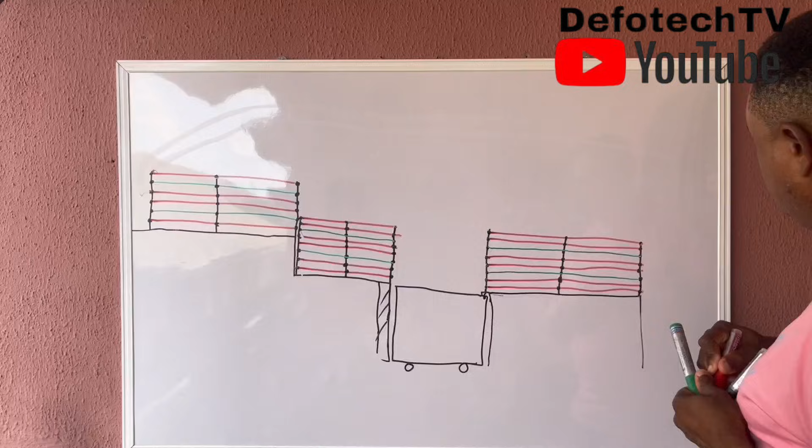We'll also understand that the 6 lines is live, earth, live, live, earth, live. But for the 8, live, live, earth, live, live, earth, live, live. So there's also a step here. All right, so this is the 8 line.

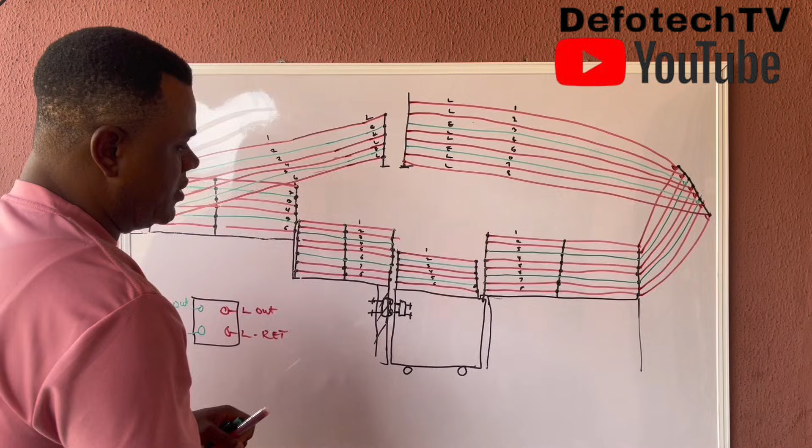This is the 6 line on the gate, and this is the gate contact. This is the female part. Always ensure your female gate contact is on the pillar while the male is attached to the gate. This is the male and this is the female.

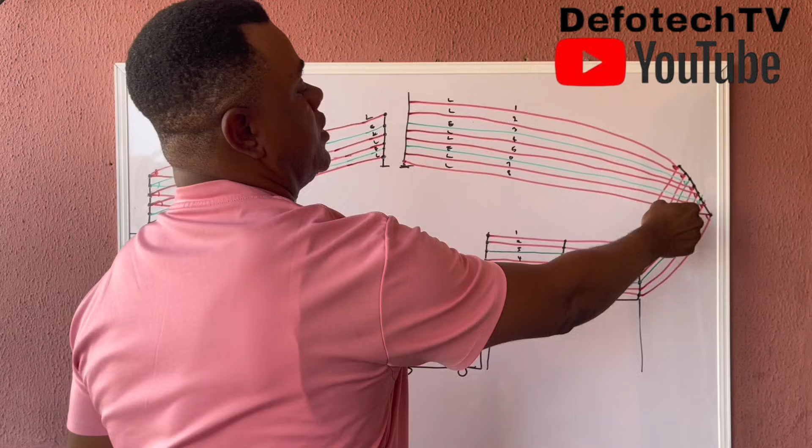All right, then this is the 8 lines also. There's also a link between this and this, each of these ones going this way. So it's like a complete perimeter, a covered compound. So we need to also close here.

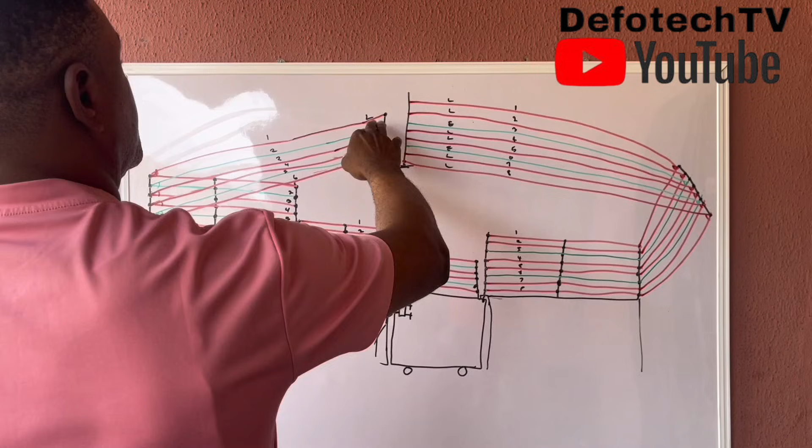So this is where we have our Energizer, the live out, the live return, the earth out, the earth return. So let's see how we're able to configure this and bring them together as one.

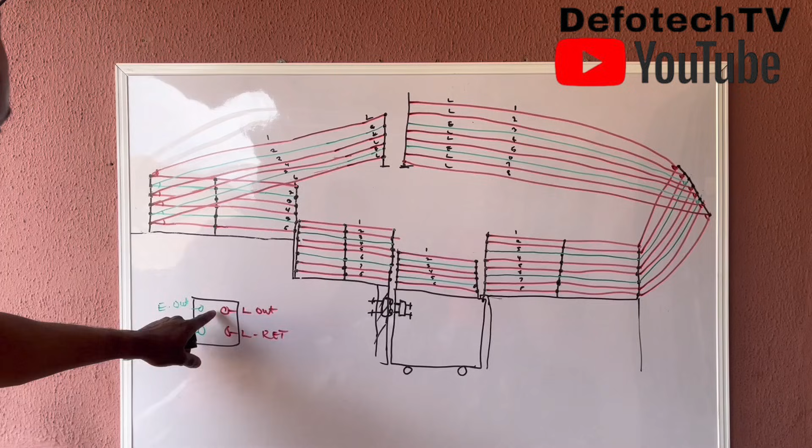Now, here is the area I was talking about. Let's assume it was continuous. So I will decide to pick here as the closest to the Energizer. If I bring it here, I think it's far. So I want to use here.

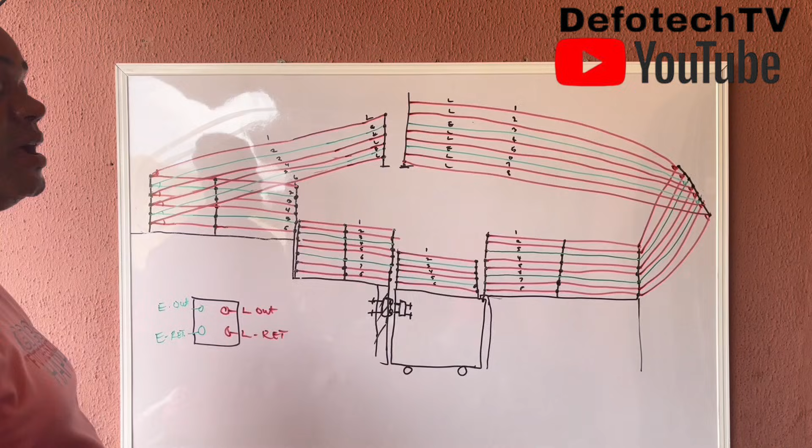Please always note, don't ever bring one cable and just put one here. There should be a separation between this and this. Let me assume, because if you want to separate this line, you have to cut this line. So let me use a spring and a hook to demonstrate.

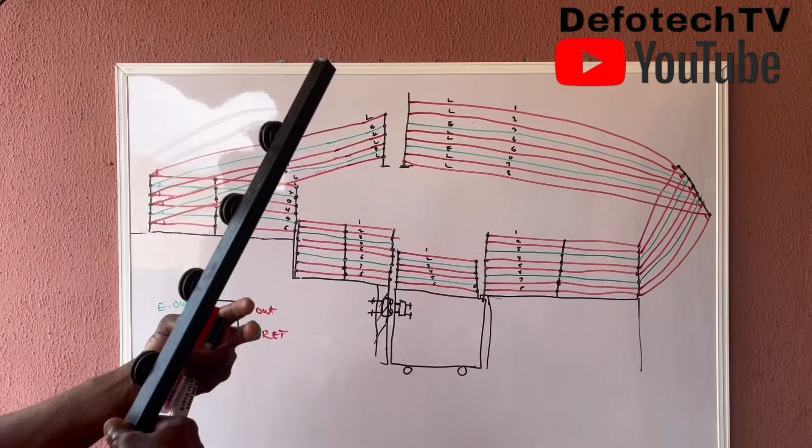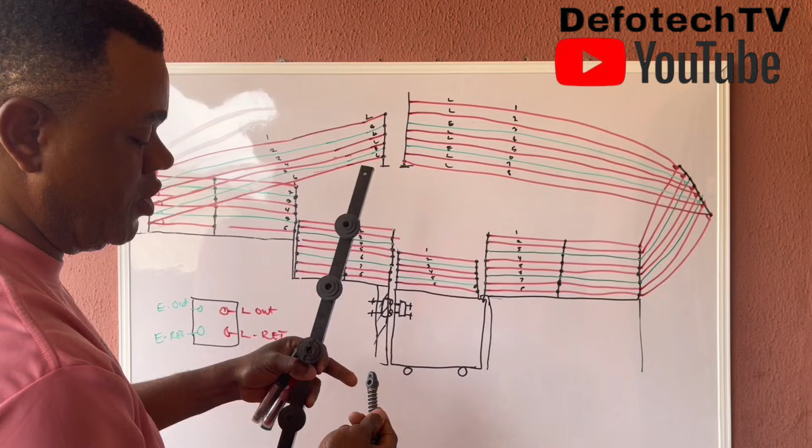Assume this is what you have here. This is this pole. If the lines are going all the way, cut one side off, then ring this other side to the fence. This other one's here, the other one here. You put your hook to your spring.

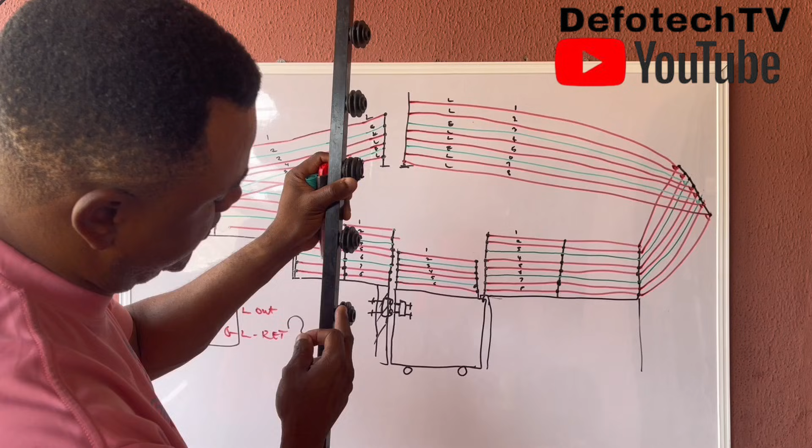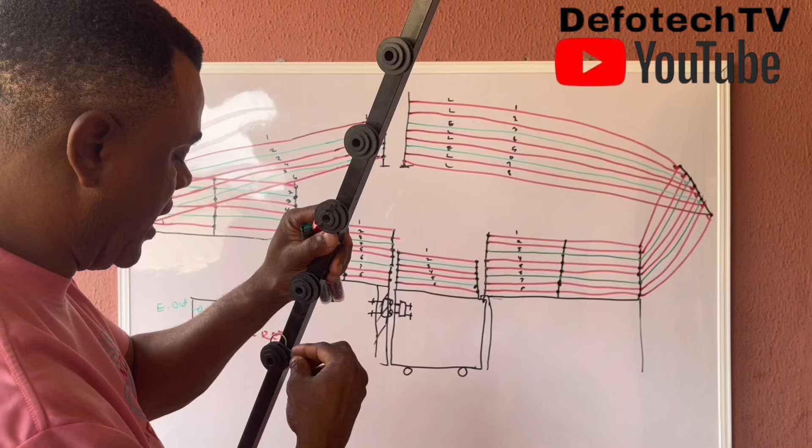You know there are different segments on your pole, on your bracket, your bobbin. You have the inner one. You can decide to come, either you want to use the inner one, since your wires, the first wire coming to this side, they'll be wound around the middle groove. You can decide to pick the outer groove, clip your hook. So you have something like this.

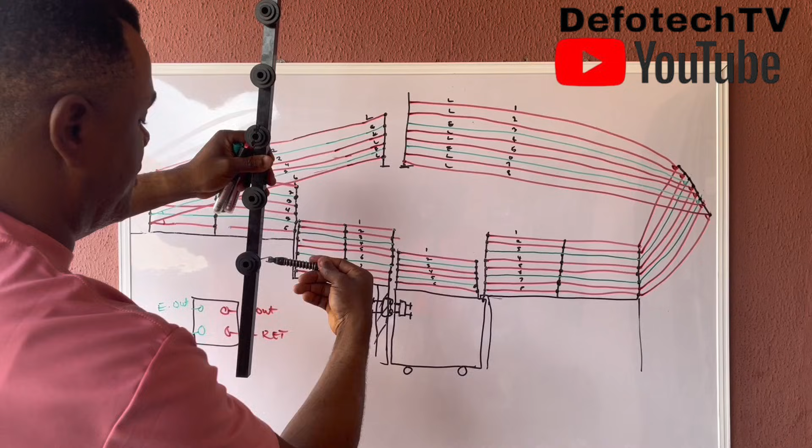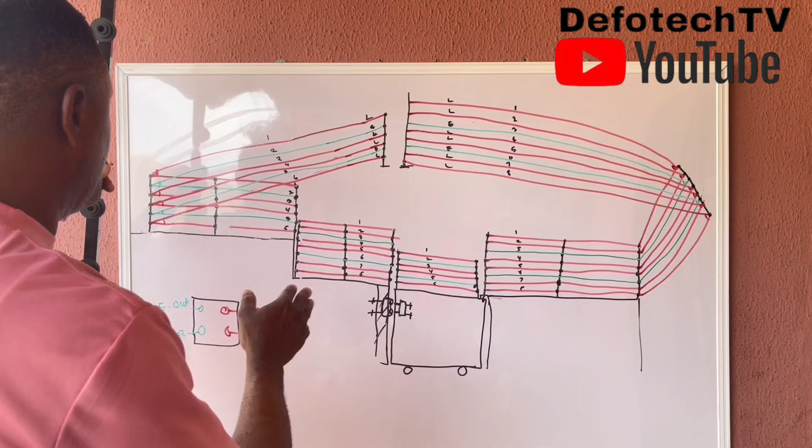That is what you have here. Then this wire from here, attach it to this. So it's therefore separating the wires coming from this side from this. So this is how we prepare where we want to connect our Energizer, because it's not at the edge. This is necessary to always separate it so that your movement or flow of current would not come in contact with each of them.

So we're able to bring more secured stuff here. So now this is what we have done, been able to do that. So we have a spring here. We're able to separate here from the side. So the wire stops here. So I can now decide to say, okay, fine.

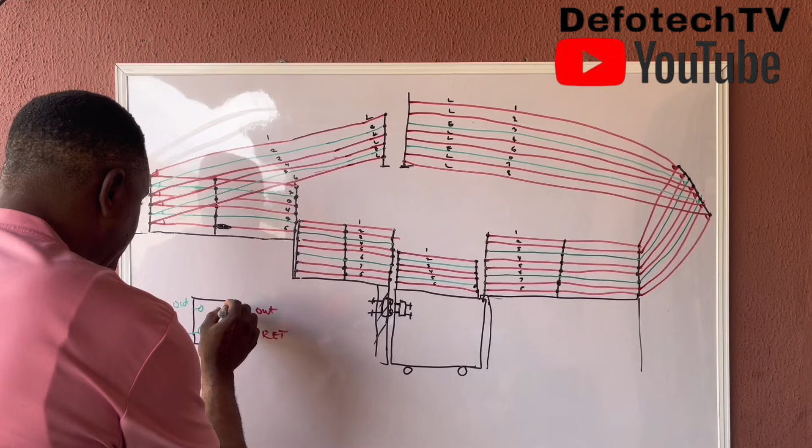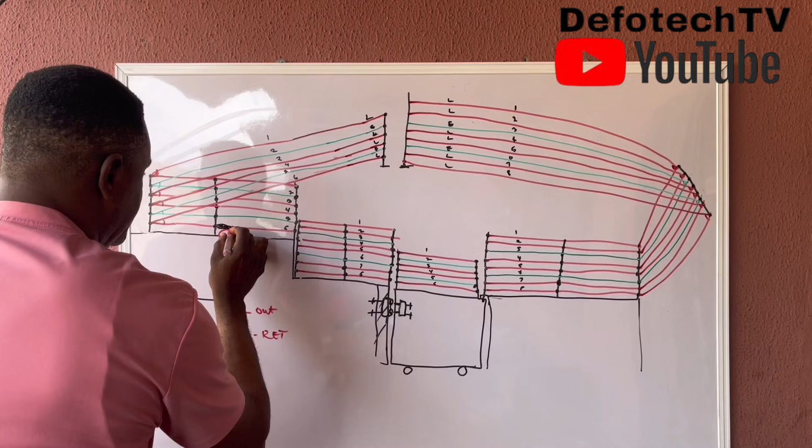If we don't, let's treat this thing independently. I'll take the live out here. Take my line from here through a conduit, the HT cable, and I come attach it to this line here. If I attach this here, all I need to do, just watch before we deal with this other side.

Now, I'll just come here and bring this, gets here, I'll loop it with this. When I get to the extreme here, see this fence is a continuous fence from here to this end. So it means every of the edge I stop here. So it means one moves all the way from here.

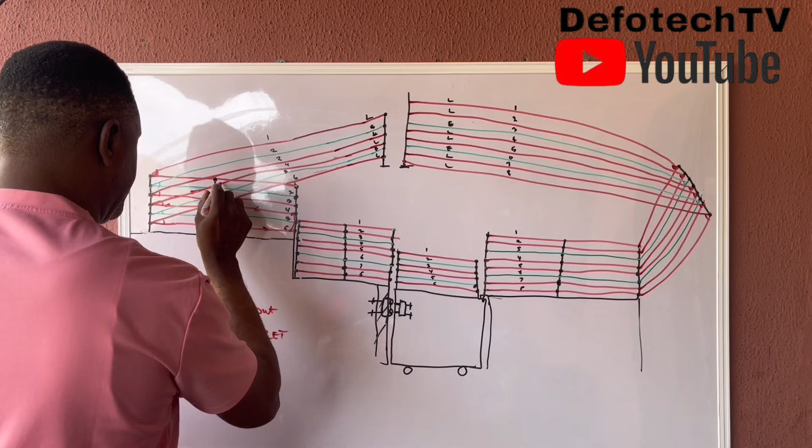It gets here. Hey, sorry, I forgot this line. It's traveling up, it's traveling this way. When it gets here, all I need to do is to loop this to this here, at the extreme, closer to the pole. So it's returning.

When it gets here, it comes this way. It gets here, that's the edge again. So I bring this one to this, which means it's moving this direction.

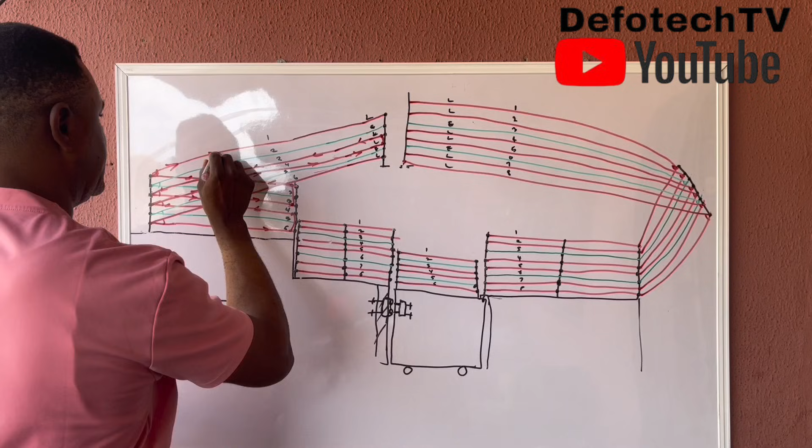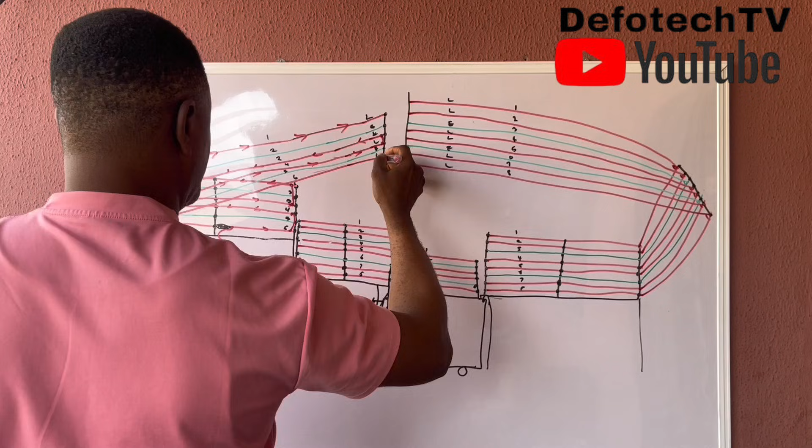When it gets to this point, now this is where we have another part to deal with, because this one, the first one, came here. So this one, there are two things. If I decide to bring this one to this place, it means it returns to the Energizer. I won't come here, I won't touch this.

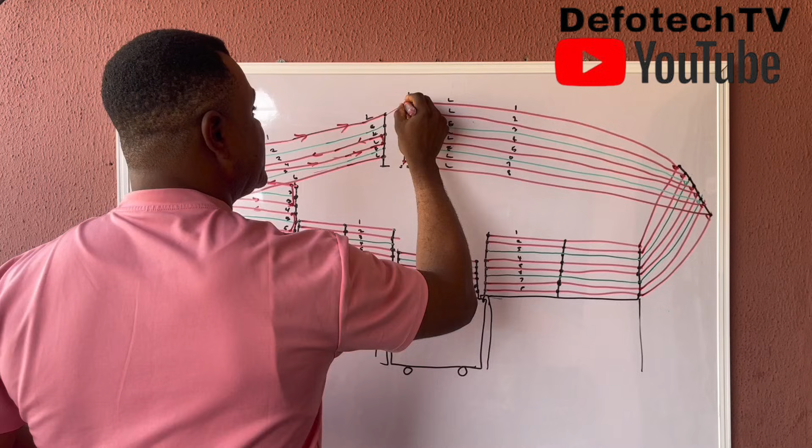So from here, this is the 8th line, this is the 6th line. I can decide to say, okay fine, if I'm taking this to this one, we have either it's going to the top line. So I prefer to take this, link this one to this, to the topmost line. Yeah, to the topmost line.

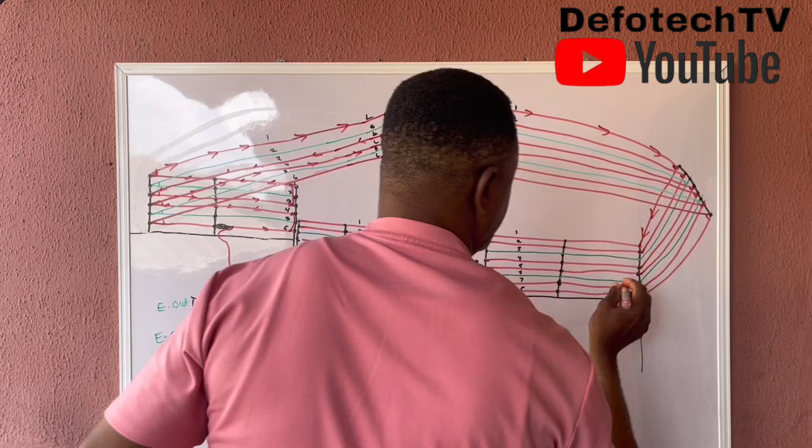Yes, from here this moves all the way, continues. So we're dealing with the 8th line. You remember this line comes all the way down here. It continues from there, it gets here. I'm not going to touch this here, just to see what we do here. So we get here, we move to the next line.

Can marry this to this at the extreme. So we're moving back. It gets here, it's coming this way. And this gets here. Oh, I'm coming out.

I can decide to come, let me marry this to this, at the edge, right? This gets here, continues here. Come to this other one here. So this returns.

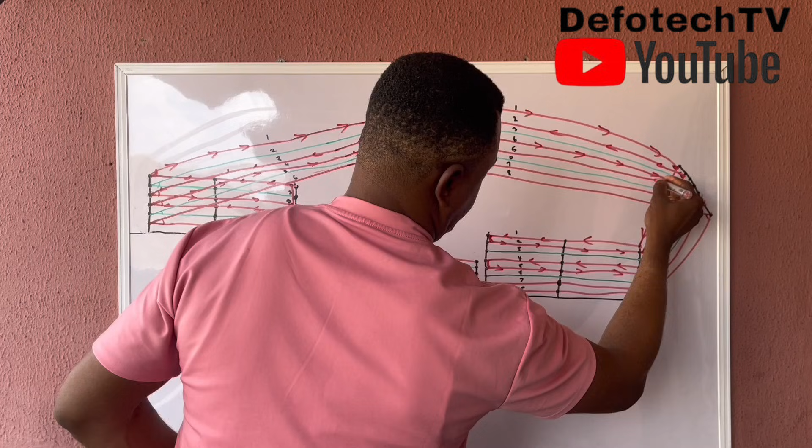It gets here, it moves this direction, moves this direction. It gets here, take this one to the next line. It continues all the way. It gets here, it's coming here.

Now we've gotten to the extreme here. Sorry, where did I jump to this line? So this one is coming here, it gets here. This marries this last line. Start returning.

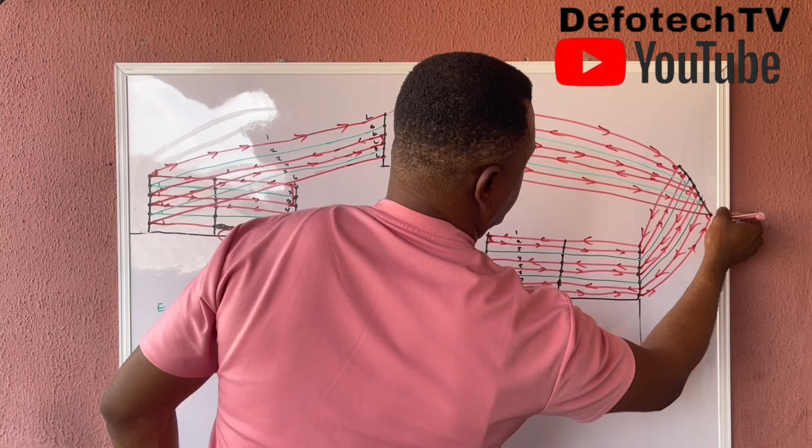Okay, yes, I'll do it this way. Yes, all the way from here to this guy.

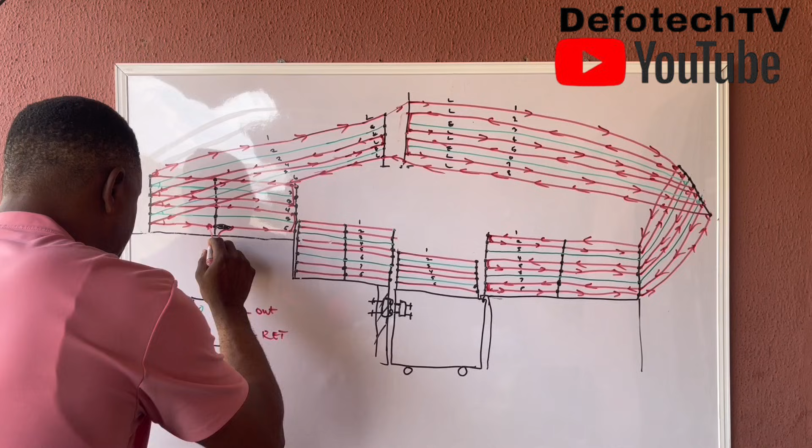It needs to come back to the Energizer. But you ask one question, you say sir, we've not done anything here. Don't bother yourself, leave it, we'll deal with this guy. So now let me take this to the Energizer. I'll take it to the return. This is out and this is return.

So we are concerned with this. Are we going to leave this place? No. But we've sorted out everything here apart from the earth. We've not touched the earth here. So, but let's leave this aside, we'll deal with this guy.

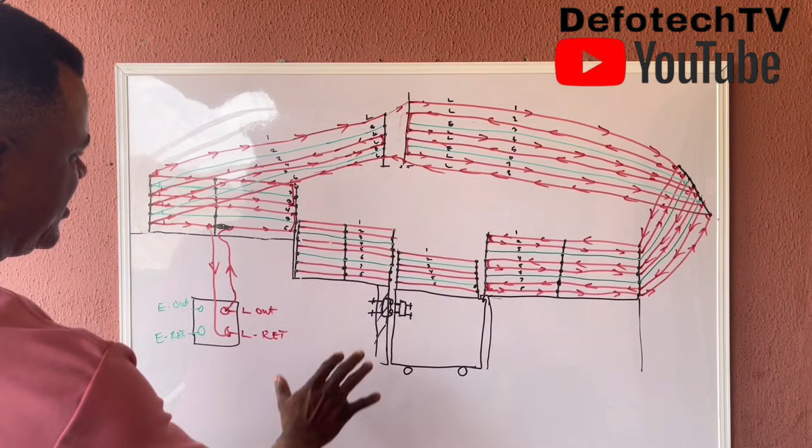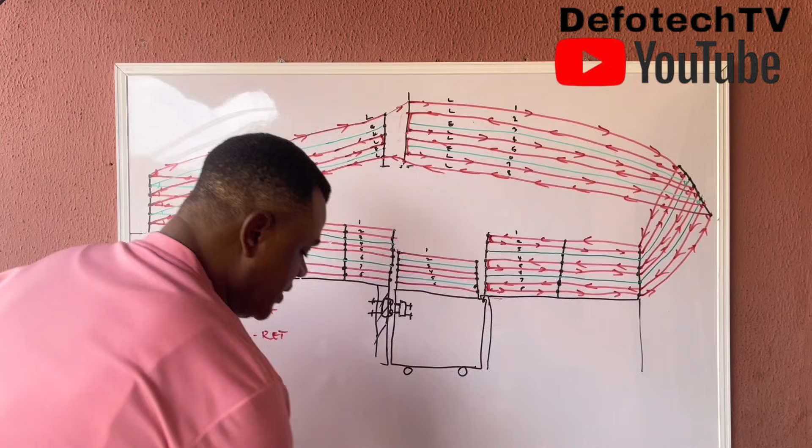So let's treat the earth. Now the same thing applies to the earth. We want the earth, we want to loop here. We will not take our earth out. So what we need to do again, the same principle we applied here, is to break this line.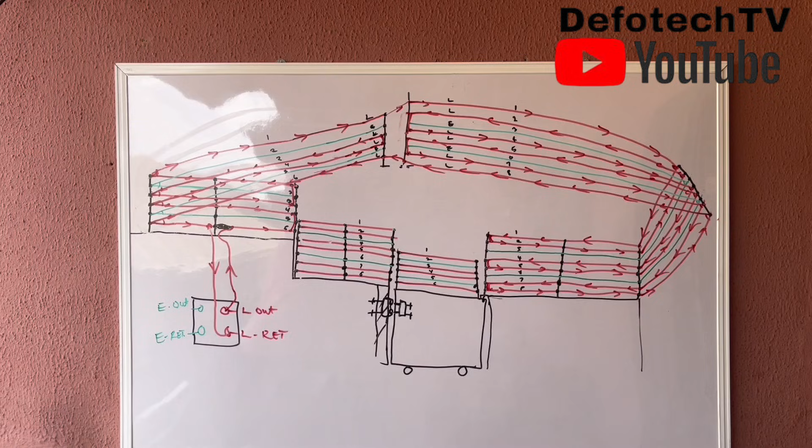Sorry, let me get stuff to break the line. Okay. I will put a spring here. So it means there is no more flow from here to here, just like we have here, using a spring.

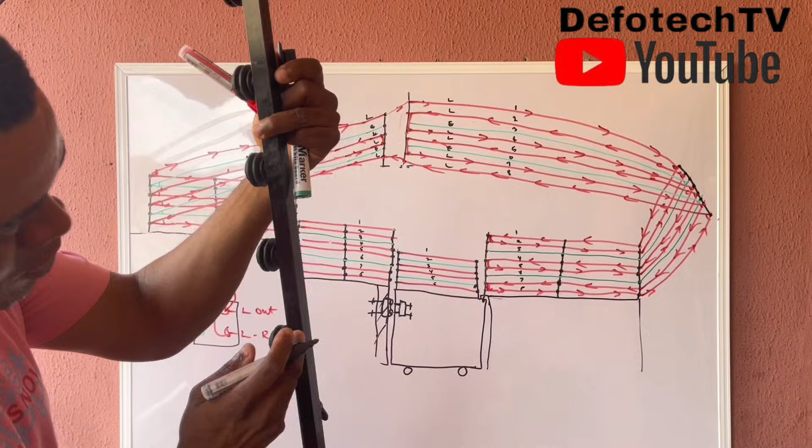One of the lines can come at the middle, use the other groove here. You see this groove? One can be here, the other one can come here with a spring. All right, so what I'll do here is to get, so let's say my E out. Okay, let's assume...

This marries this, then it means this goes all the way. It gets here, I'll need to find a way of marrying the other edge. This one moves all the way, it gets here, this is going up. It gets here, I can as well just feed the last guy.

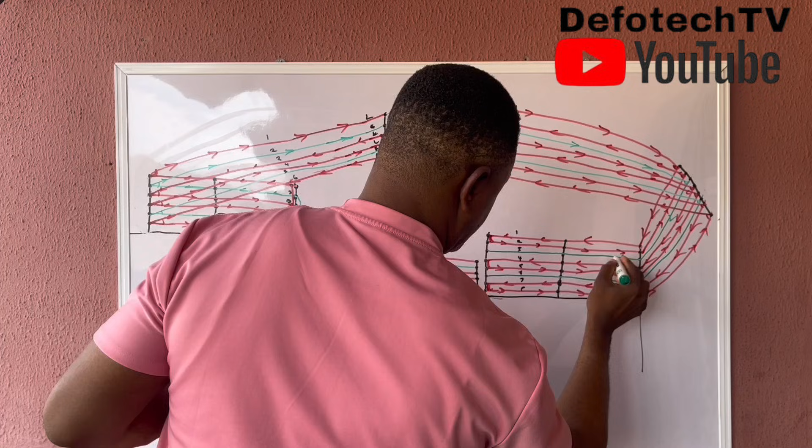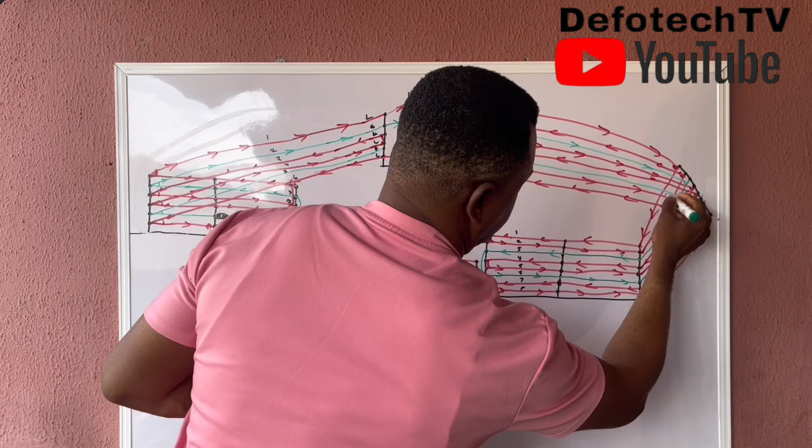I come here, all right, just to gets here, it comes down. It gets here, then I'll need to feed this, returns, bring back up. It gets here, feed this guy, this direction. This gets here, bring it this way.

So it means we've been able to close this gap, if there's any gap, so nobody can scale it. If you cut it on this line, the alarm goes off. Then this one comes this way, right? It gets here. Then when it gets here, it needs to go back to the Energizer. All I need to do is to take this with the same HT cable back to our Energizer.

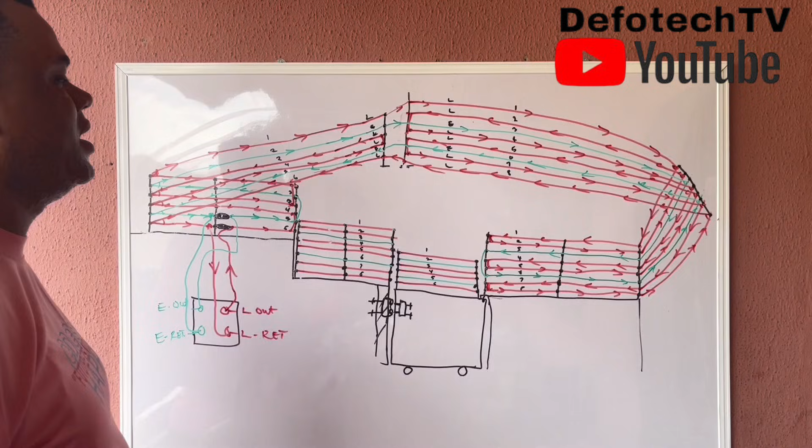Now you're still bothered about this. Now this is the time for us to deal with this guy. All I need to first do is to come to the gate contact. Now you must understand something that has to do with this gate contact, exactly, because it's a 2 poles gate contact. We have the 3 poles where you have your live out, your live return, your earth.

Because of this, we're going to have only the live to this gate, the earth, we can isolate it. But since the top and the bottom is covered, it means it's secure. If anybody tries to scale here, there'll be a problem. If you try to cut it, you'll have a problem.

So now what I need to do is take one from here first. Let's assume I feed this. This goes all the way. Just watch, this feeds the next live on the gate. This one goes to the next live. This also goes to the next live.

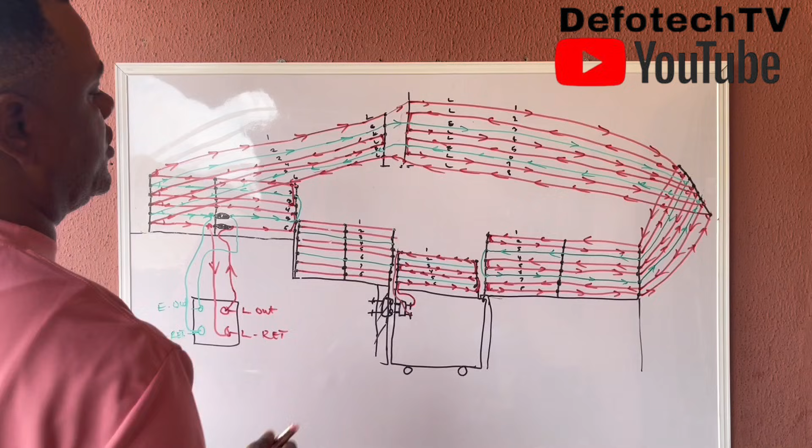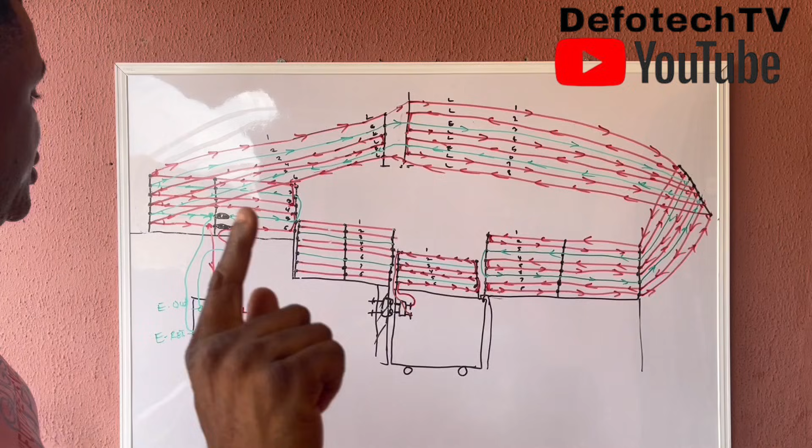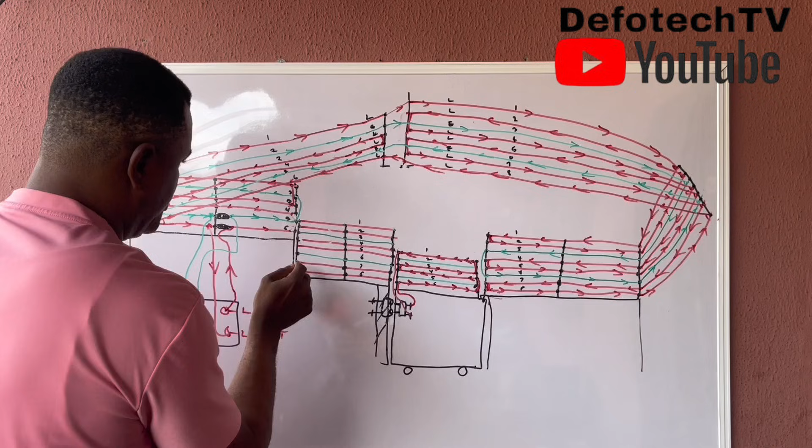What you need to do, just watch. This is the trick here. Come to this one closer to the pillar, to this step. Open this one up, open this place up. Open it up. Let's assume this one stops here.

So we've removed the loop from here to here. So now we can say this one is out, see the direction out. We take this one with the HT cable, we marry it to this, so it means there's a flow to this direction.

This gets here, marry this. This gets here, it marries this one. This gets here, it marries this. This one gets here, it marries this. This gets here, it marries this. This gets here, then you link this one back to this.

So as if now it's continued, it's as if a continuation. So if you look at this whole thing, this whole is settled. But we don't have supply to this gate contact. I've told you about the principle of how gate contact works.

You can go and check the video, I don't want to talk about that here, how it works, the principle of gate contact. So all I need to do is, how do I feed this gate contact?

I'll come here, open this loop, the loop here between this and this. Open the red connection, the red, take this one, connect this one here. I can take this one, connect it here. That's just all.

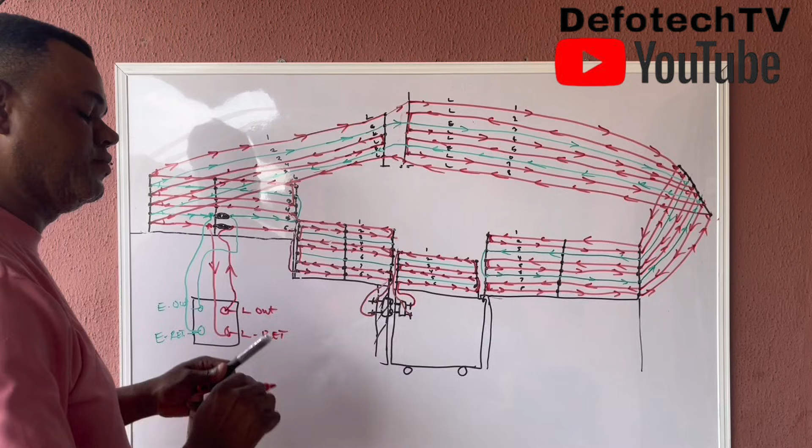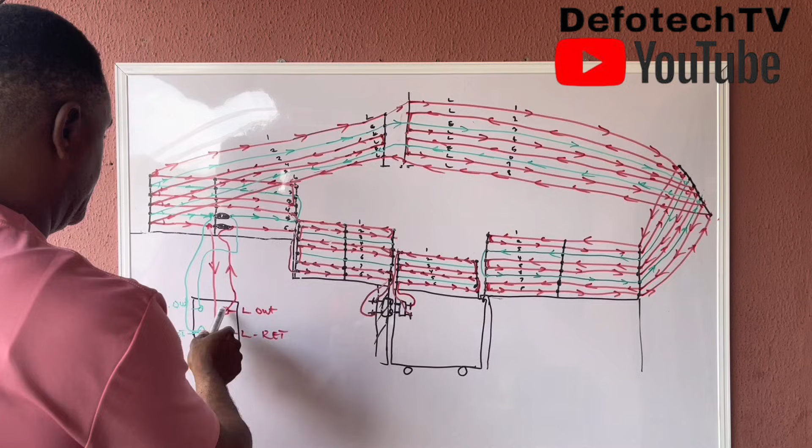That's just all. You see, if we follow this line, let's see the movement of current along this line. And you see there's nothing like a parallel connection, it's not like it goes this way and returns this way. Let's follow the movement trail. This moves all the way, it gets here, it means we enter here.

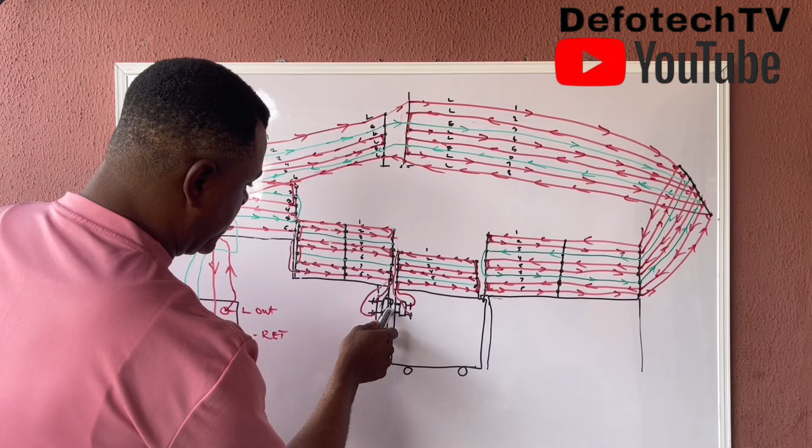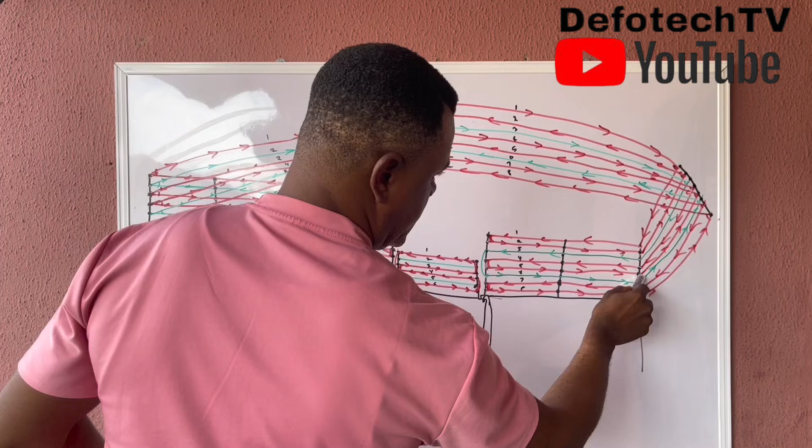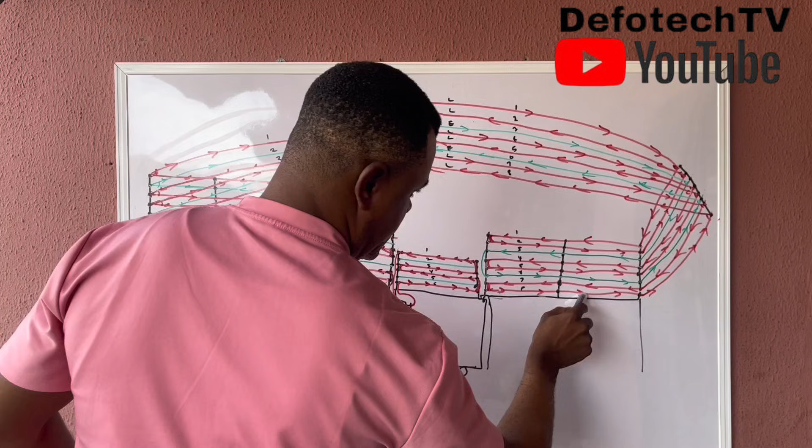See this movement, gets here. This one gets here, it comes here, like that. It comes here, gets here, to this guy, to this, this one gets here to this, gets here, here, to the second line, here, second, here, moves to this one, the fourth, here, here, here, to this line, here, here, this, to this, to this place, here, here, all the way, gets here, crosses to this side, yeah, and here back to the Energizer.

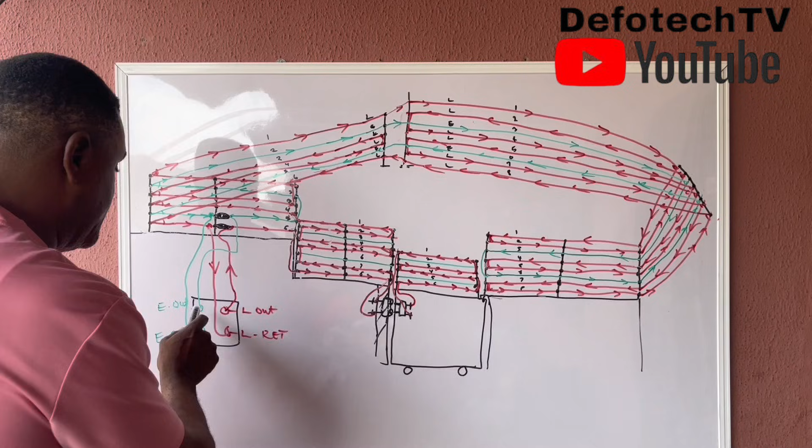For the earth, also have the same thing. This moves all the way here. Okay, we've not connected this, sorry, we're missing one out. It's almost the same thing that we applied there.

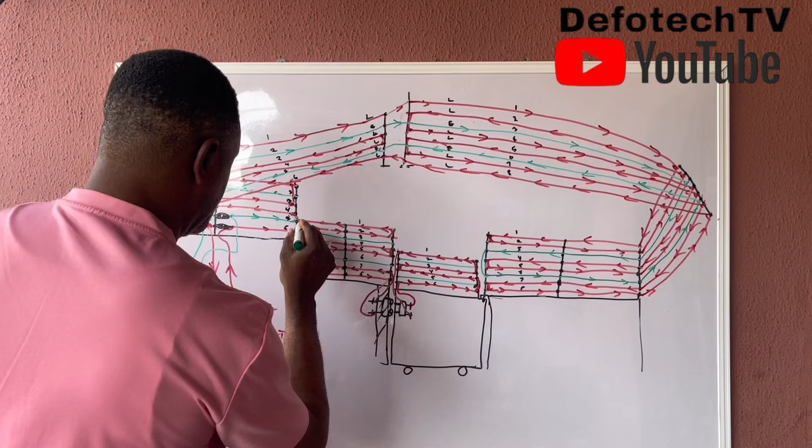We just need to break this supply here, take this one. I say we'll take this one out to the bottom one, feed this, goes all the way here, this gets here to this. I'll take this one back to this, sorry, this direction.

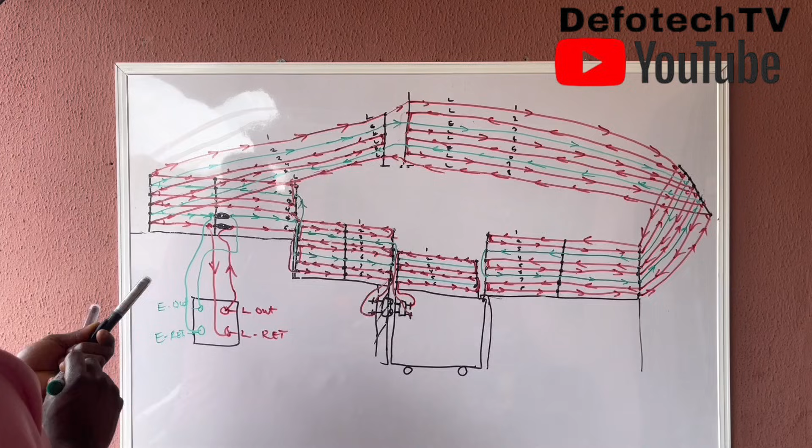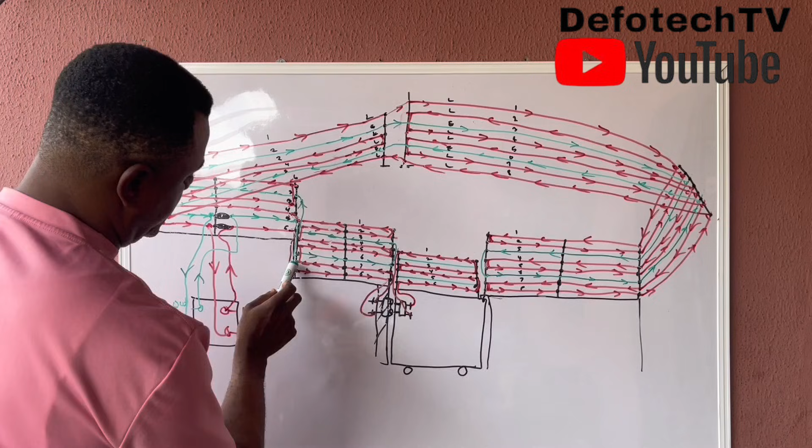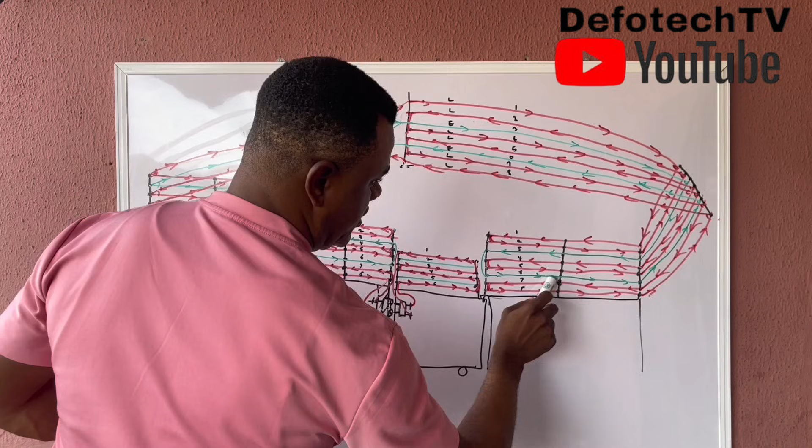Okay, let's follow the Earth's movement. This is the out, let's say this is out, and this is return. All right, let's follow it, let's trace it. This gets here all the way, feed this guy here, back here, here, it moves up this way, it gets here, here, here, here, here, here, like this, gets here all the way back to the Energizer.

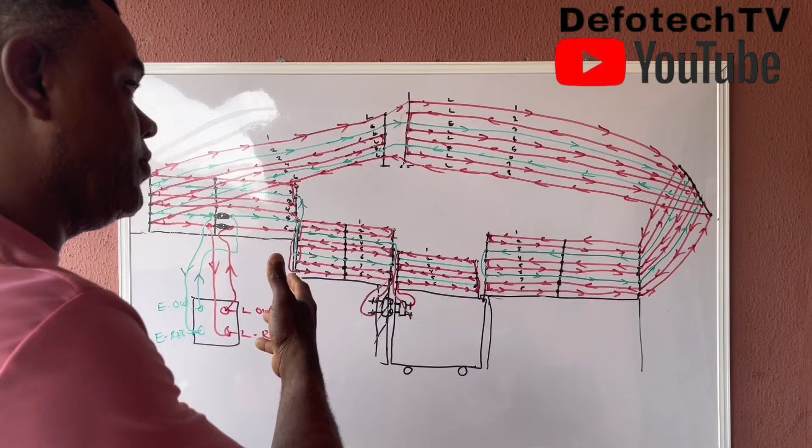So this is what this will look like and how you can configure a fence like this. I hope this is clear enough. And for you who asked this question, I took my time to make it very complex so that I break it down one after the other so you can get the whole gist.